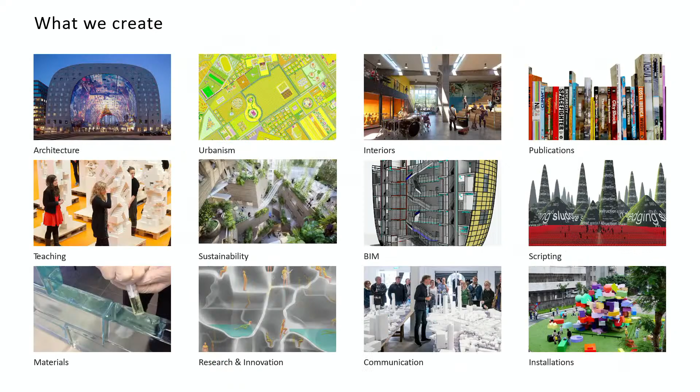And the office is known now—we celebrated 30 years of MVRDV—for a variety of things, but mainly I think for always this combination of research and working at all different scales, and this will also come back today in the lecture. It's probably most known, especially here in Germany, for the Expo Pavilion from 2000 in Hanover. It was kind of the groundbreaking project for the office. Other milestones since then were the Markthal in Rotterdam 2014, the Depot, which I will talk about today and which opened recently, and even newer, the Valley in Amsterdam.

So, stimulating heritage—as I said, I thought, okay, how can I connect this to what we do in the office? It's a theme, it's in Armenia, and actually we have a few projects there. I also had to think of this example from Yerevan, this brutalist monument, and then I thought, okay, this is actually the link to introducing a third project. So I hope we don't expand the time frame too much, because I think it's about how can we treat heritage in a different way, and I will frame it to talk about how can we treat the monument, how can we treat the shelter, and how can we treat the campus.

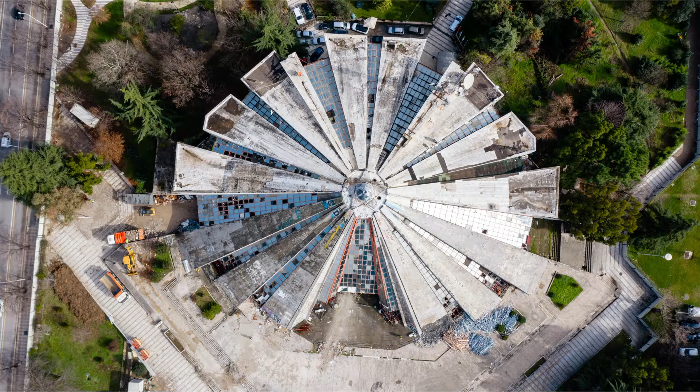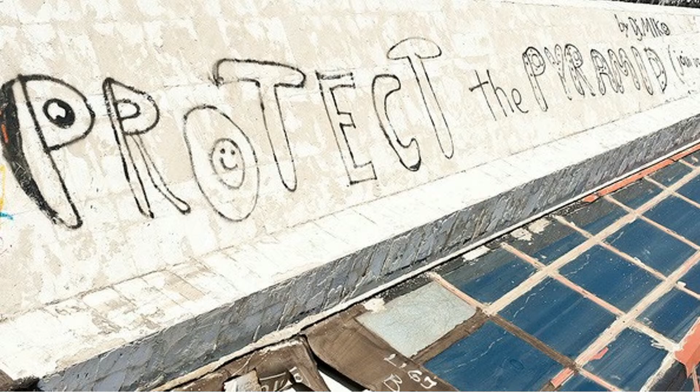And I start with the monument, specifically the Tirana Pyramid—that's also the link. This is an old monument built in '88. It was supposed to be a monument for the old former dictator Hoxha, and it was vacant for a long time and empty, and most of all it got neglected and taken over by the people. There was different use of it, cultural institutions or bars and clubs, and as it is so dominant in the city, people just took over. And when they heard it should be demolished, and actually the new parliament of Albania should come there, they protested, and they did it pretty wildly. So the government was a bit in limbo—okay, what can we do here? Because we cannot just make a new parliament.

So the question was, how can we save such a neglected monument? This is the link now to Yerevan, because an institution called TUMO, which many of you here know, came into play, and somehow we got connected via the government of Albania. TUMO is an organization that is a center for creative technologies, free education for young people. It seemed that this is exactly the right thing that Tirana and Albania needs at this uprising situation where they are investing a lot in architecture and infrastructure. So we got matched together to create a new hub for these young creatives, and the pyramid seemed to be the right spot for that. So the ambition was that we had a pyramid in the past.

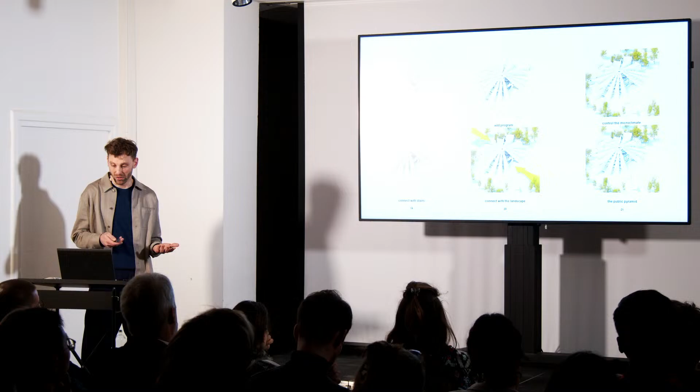And as it is kind of a hollow shell, we thought, okay, we can stack program into it in shape of boxes, as many as we want and need. And then it was about creating the access and openness to the building by adding a new facade.

So this is a quick program analysis. It mainly should show that, okay, there was a program intended by TUMO to be used, and there is something that should be used by other parties for the public. And we thought, okay, there is also part that overlaps, and maybe there are things from TUMO that the public could use and the public that TUMO could use. And if we spread it into the surrounding, we can actually make the access bigger. So this program got stacked in different boxes into the pyramid and the pyramid around.

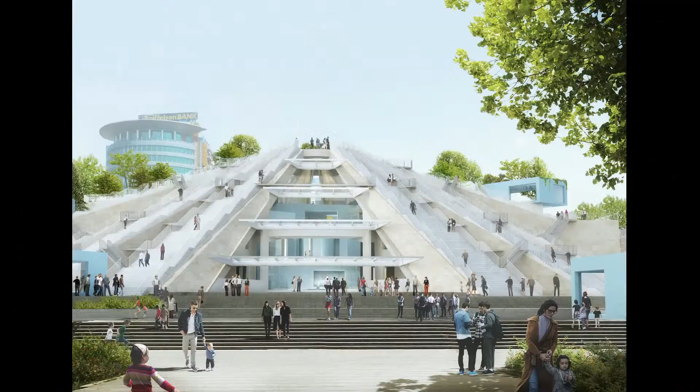So these are early concept images. And from the beginning, there was this differentiation of boxes that are for TUMO and for the public. So here, a first sketch of how this should connect to the surrounding. When the boxes are inside, they are also stacked into the existing structure. That means simply in the middle, you have boxes that are stacked on each other. It's their own structure, but sometimes it's more complicated because you're intersecting with an existing monument in that sense.

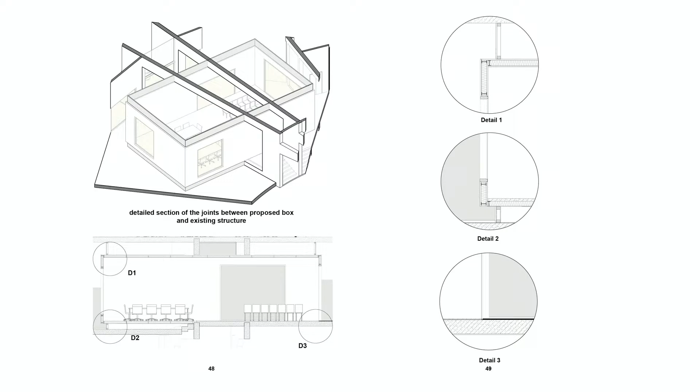But it worked out quite nicely, and at that stage we thought, okay, actually it's something I only heard in preparation for this meeting, that usually we are the ones who come with the color, and it seemed like when we came with this first proposal, we wanted this clean monument, one color, bluish from the foam. That's a bit of a fetish, I would say. But then Winy was sitting with the Prime Minister at a table, and the Prime Minister gave a little hint, because it's also not the first project we have in Tirana. The Prime Minister said, okay Winy, we bring MVRDV here to Tirana, and the first building has one color, and the second one, another tower in the center, has one color, and now you give me this again, it's one color. That was the moment when we said, yeah, rightfully, this is a project for the city, it spreads out, so it's nice to introduce a color scheme, and everyone got happy by this.

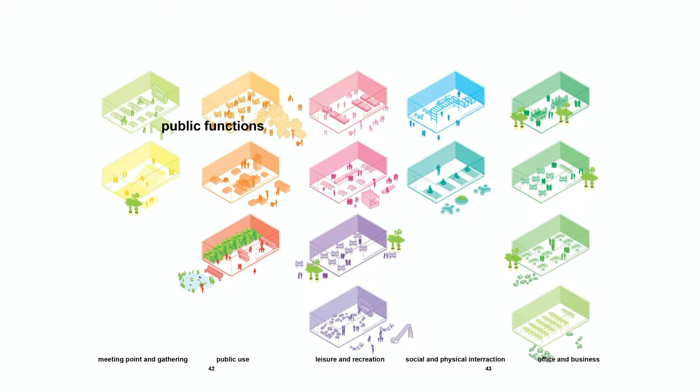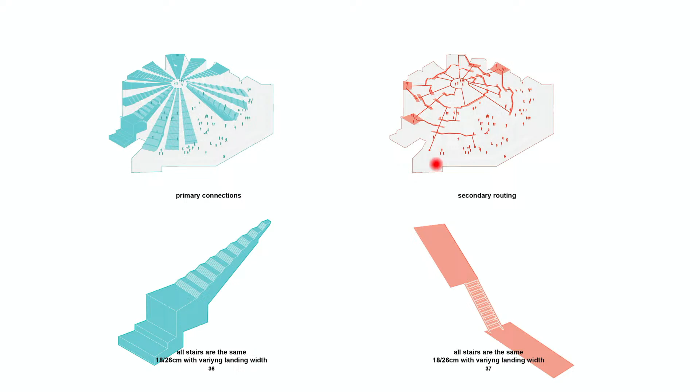So this is the internal connection stairs.

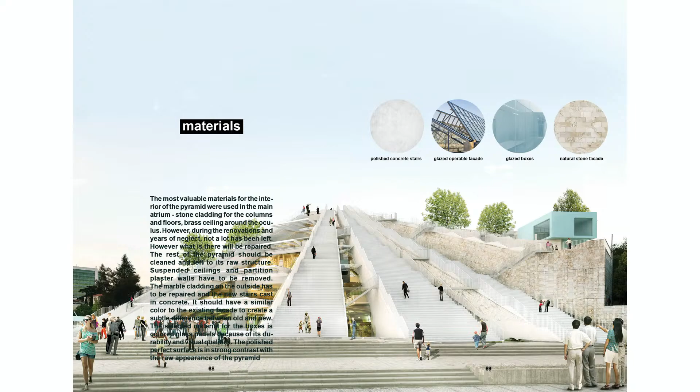What we always try to do when we work with heritage is really expose it as much as possible, so that you can read what is the old, what is the new, what are traces, so that when you go to the building, you also witness what happened here over time. So that's something we did when choosing the materials.

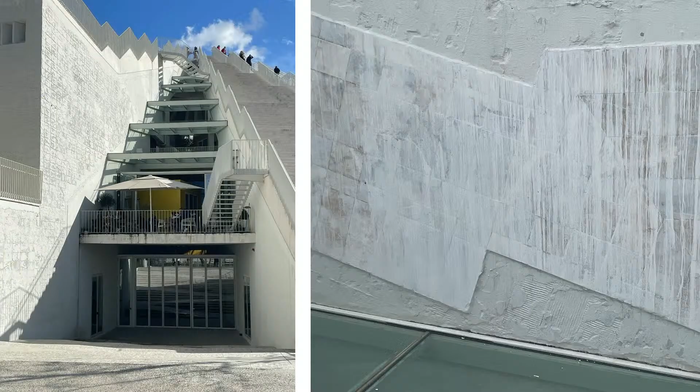Besides these colorful boxes, they are new. The former monument had this natural stone facade, but over time, as you saw, it broke down and fell apart. So for us, the idea was to keep the natural stone where it is, and where it isn't, we fix it simply by painting and plastering, which you see here. So then you get this very rough appearance of the old and the new, and where it was possible to keep it and where not.

This was the state when we started, and it was very adventurous site visits.

But this is where we are now, and it's really beautiful to see how the building got accepted by the public so much, because they already had it, they identified with it before, but now it really gives public space to the people.

It gives a different experience when walking up and down. It has a lot of viewing platforms, so when you're there, you really see people hanging out and enjoying the view and their city, and it's nice how you can see that the city is really in rapid transformation.

Yeah, and we always try to add a few funny aspects, so glass floors is one of those. They come back in many projects, and also here from the top you can look inside into this void and experience from the top and from below, which is quite beautiful.

So I think this image sums it up quite nicely. What we can do with a monument that maybe others would have already demolished, but if we really analyze it and bring it together with the right parties, like luckily we had here in this case, we can make something extraordinary. Ultimately this acceptance is also probably the most sustainable part of this project, because instead of demolishing, we really took the effort to see how we can give it back to the people.

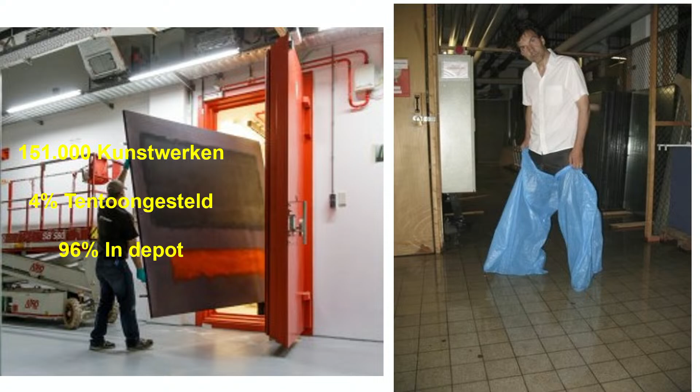Depot Rotterdam belongs to the great museum Boijmans van Beuningen, and it's in the center of Rotterdam. It has a classic museum with all the big art that there is. But it had one main issue in the last decade, and it was that most of the artwork was stored in the basement, but then the groundwater couldn't be kept away, and so it had to move.

It had to be saved in a warehouse. So that was the initial idea for this new project, because it's a bit of a shame if all this amazing art is in such a warehouse on the outskirts of Rotterdam.

So that was when, I think it was 2015, the competition was started, and MVRDV in the end was the winner. I'll show how we came up with this volume simply.

So there's this site, for those who were in Rotterdam already, it's called the Museum Park. It has a big square with the European flag designed by OMA a long time ago, and it's an axis between the Kunsthal, the Museum Boijmans van Beuningen, and the New Institute, which is also the architecture center of Rotterdam.

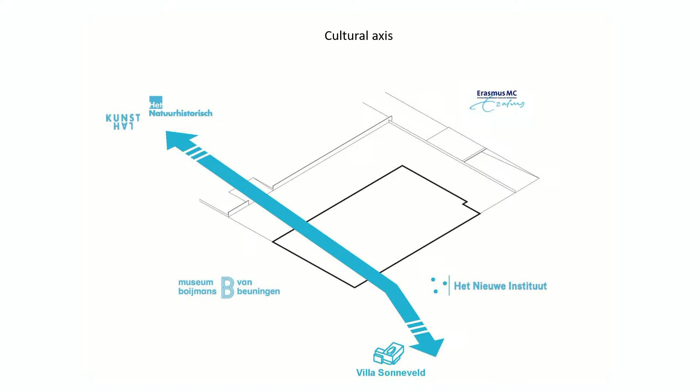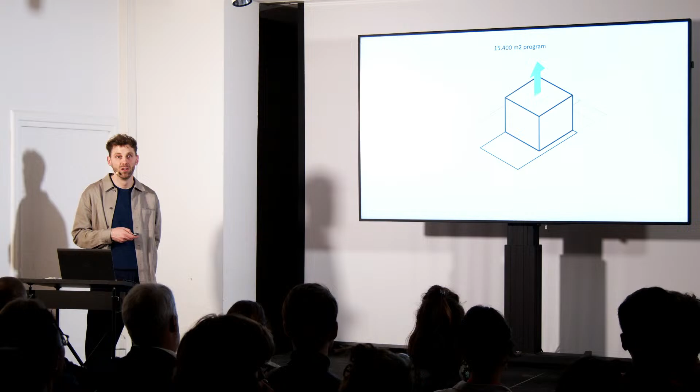That limited the site already, and back then it was a square with a lot of trees, which was important. So the site was limited, the program was still a lot, and the question was how to create a volume that fits into its surrounding, because all the surroundings, besides the hospital on the other side, are lower, and also how to gain the acceptance by the people again if you take away their green park.

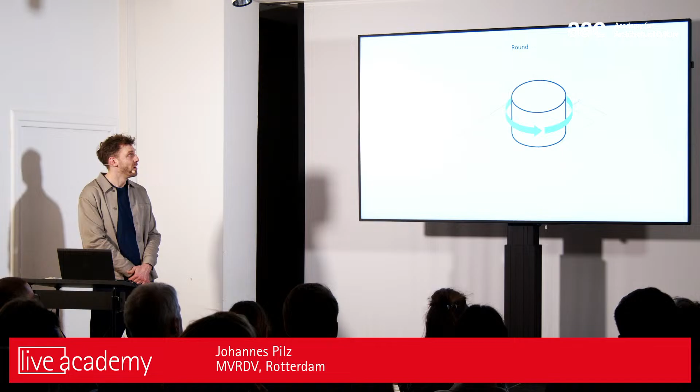So we thought, first of all, a round building, you don't want to give them a facade or block any direction, and you want to minimize the footprint and maximize the public space. So that's why we shaped this cup shape at the moment.

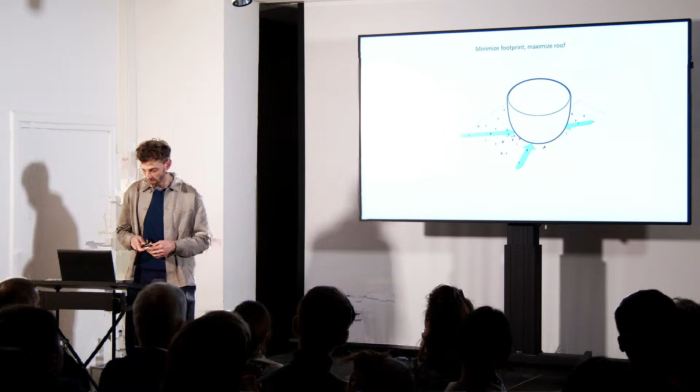And there was another reason, because every 2 years there's a big theater art exhibition there. It's called the Parade in Rotterdam. And they used this square, so it was really the task of how this new museum fits with this festival that comes there every 2 years. It's a big thing in Rotterdam.

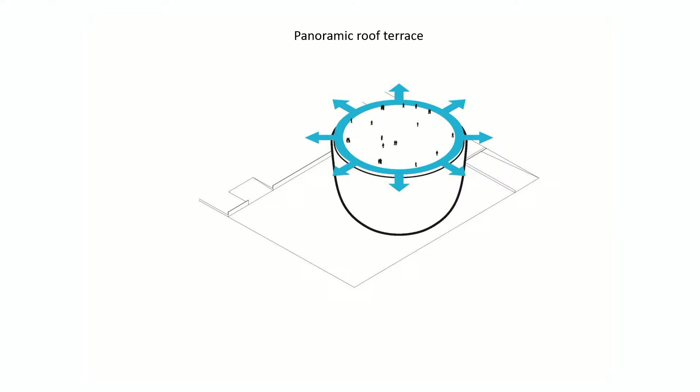It shouldn't be too tall. It should have a panoramic roof terrace to give back the public space, and it should still allow for the connections.

So ideally, you want to give a reflective shell, because that gives a reflection from the square. It lets you look around the corner if you have this round shape. The volume dissolves because it merges with the sky. And at night you see the interior, but also the skyline of Rotterdam. It's one of the main features.

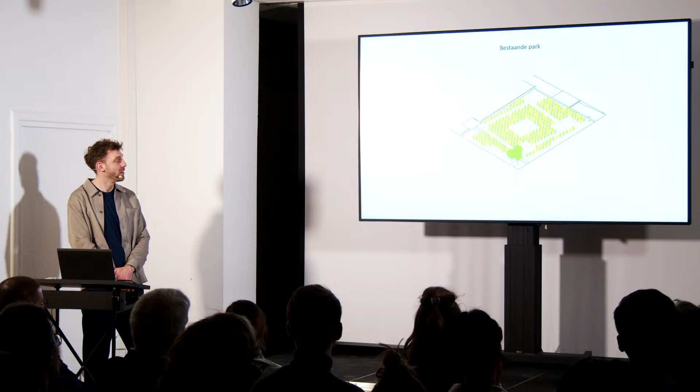Besides the mirror facade, creating a roof terrace gave us the opportunity to not take away the park, but to extend it and create a roof terrace that is publicly accessible. And that was a key argument also in the winning proposal.

Initially the idea was also to take exactly the same trees, and the effort was even made. They took all the trees, brought them to a tree nursery, and the idea was to bring those back. I don't know the whole story anymore, but it wasn't possible to bring all the trees back, so they had to replace it with the same kind.

So that was the concept. 2015. There was a long process.

There was even a lawsuit in between. It was resolved because they said MVRDV were too close to the director of the museum, and Winy always drinks coffee with him, so he must have known already. One of the main arguments was that it cannot be, because Winy doesn't drink coffee - if you are in the office, he wouldn't do this. So of course a joke, and not the main argument, but it was resolved that that wasn't the case, and we could start building.

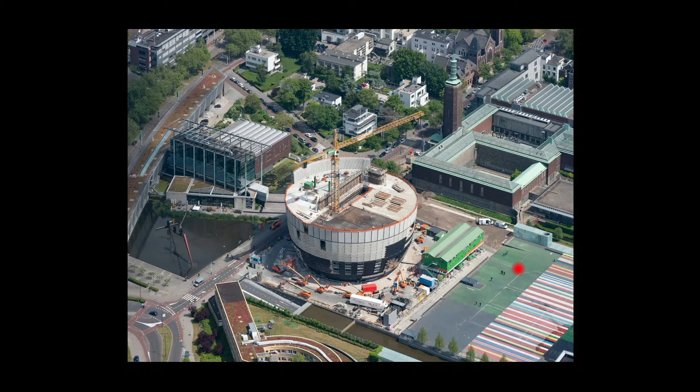So this is from the construction site. This is also the square by the OMA flag that I meant. Here's the museum Boijmans van Beuningen, and here that new institute, the architecture center. So here you see how the construction went on, already the facade starting while the top was just topping out.

And you see only these few openings because we're creating an art depot. So we want to make all the art accessible for people, and even though it's stored, you can experience it. That helps quite nicely with such a shape that is mirrored and doesn't need so much windows or access.

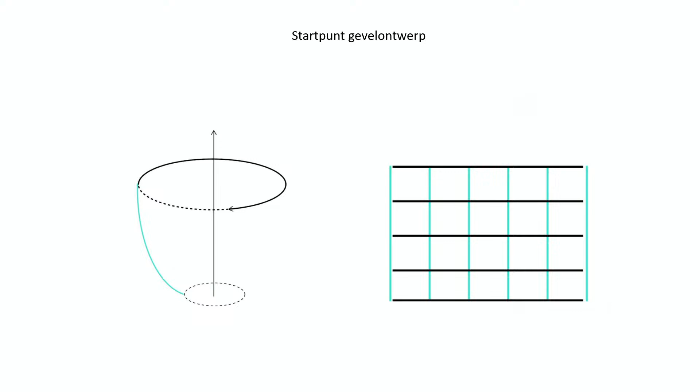But it also meant that it's a very simple building - the main point is the facade, and that you have to do right. So there was a lot of engineering and paneling, a parametric approach to it.

Obviously, the panels are double curved, and that's how the panels are in the end here to see in a mock-up, and also later on the building, how they are mounted and how it reflects.

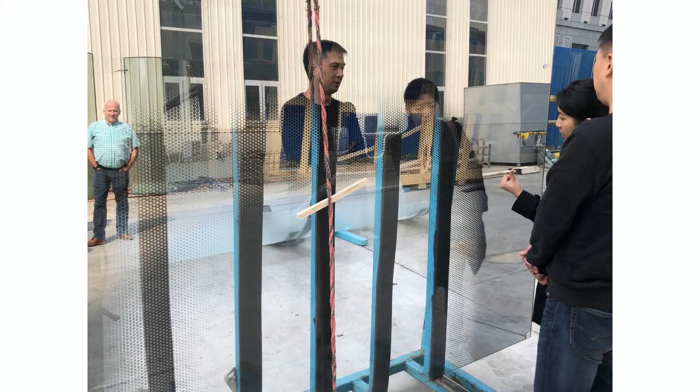So you saw the windows that also had to be solved. Obviously, how can you look from the inside to the outside, and how can it still be reflective? And you see this is by this silk screen print. It was even more important later when...

...the nearby hospital said, okay, we want to change this building because we have an institution where young kids cannot deal with this reflection. But we could easily change the print and say, okay, in some areas where the view is there, we don't have the reflection. So one thing was the mirror facade that had to be engineered and money had to be put in there, and the other thing was the access on the ground floor.

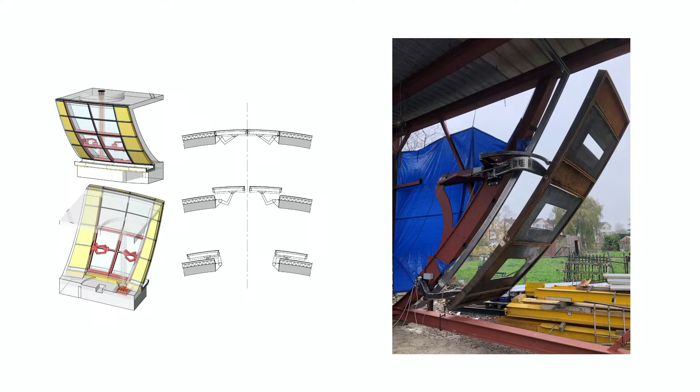This is maybe the downside of a building where you give it to the public and make the ground floor as small as possible—you have to cram everything in, the entrance, the delivery, and the side entrances. So the goal was to create this very engineered experience that can open and close, where the project gets this monolithic shape again, and the trucks drive in.

It looks like a very simple building from the outside, also when you're inside, but there were a lot of iterations, and it took a long time to actually come to this simple idea.

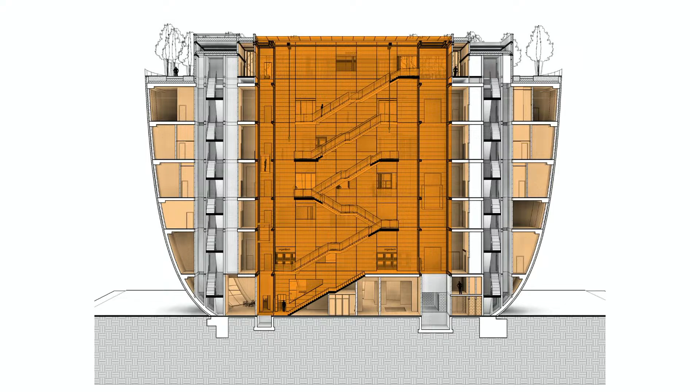You have this cup-like shape, with exhibition spaces on the side or some storage space, and a central void where people can walk, or whoever has access can walk freely and experience the art through windows. On top you have the public roof terrace, which can be accessed all the time during opening hours, but it's freely accessible. So the heart of the building is this void.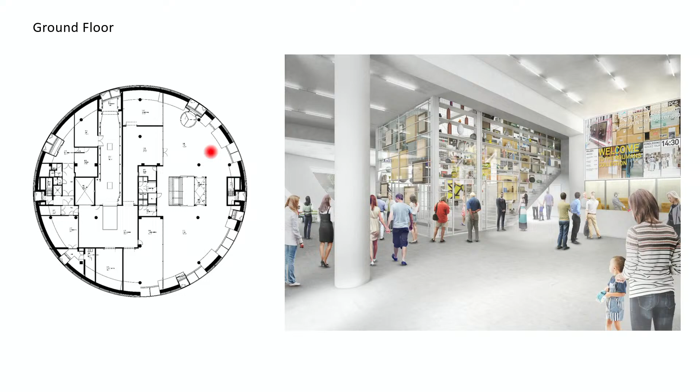It's a very cramped experience, but it helps a lot because when you enter, you feel like it's not so much space, but it really works, because then you enter the artworks and see how this void opens up. It's a very grand experience because you have this glass, metal—you see artworks hanging everywhere, exposed behind glass. So it really helps to have this threshold from the lobby into this atrium.

You can see the light on top, because this is the atrium connected to the roof. Going back, this was the intention from the competition: an atrium where all the art can hang, and stairs that cross up and down, so that you can have access by foot, but also by elevators.

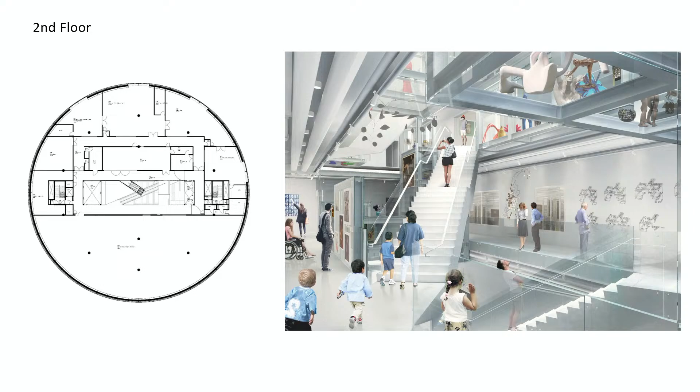If you weren't there, I really recommend looking up YouTube videos from these elevators, because it's quite an experience going up and seeing all these levels. Funnily, in the beginning, the project was designed thinking people will take the elevator up and walk down. Now the real situation is the opposite, because you enter this space, you have all the stairs, and you get pretty overwhelmed, and you want to experience it, so you keep walking.

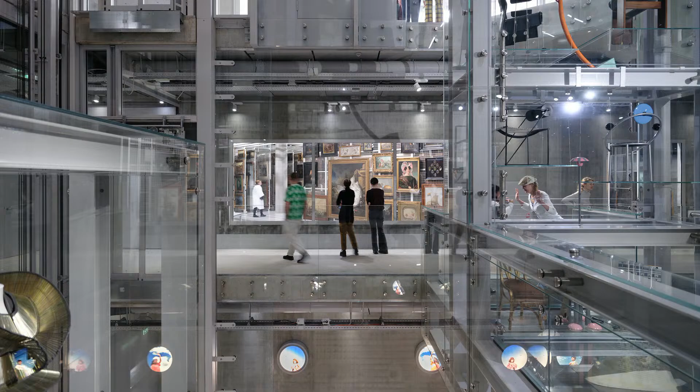This is a few shots of how that works. You walk a lot over glass floors, you have a view into the storage, and it works a lot with an app—you can check what is in this space. Very often they showcase depending on different topics, but in the end, you are free to just see what is there without too much curation.

You can take a tour and then really go inside and see all the artworks. There are also a few dedicated exhibition spaces for temporary exhibitions, and they show quite nicely the views to the city. There are these few windows that frame really different aspects of how the city is connected to the building—this is the hospital in the southwest.

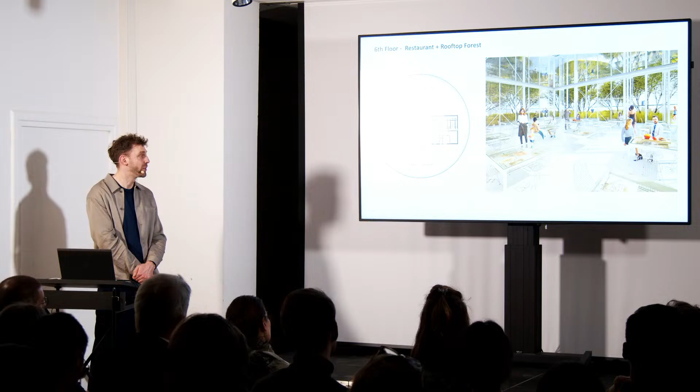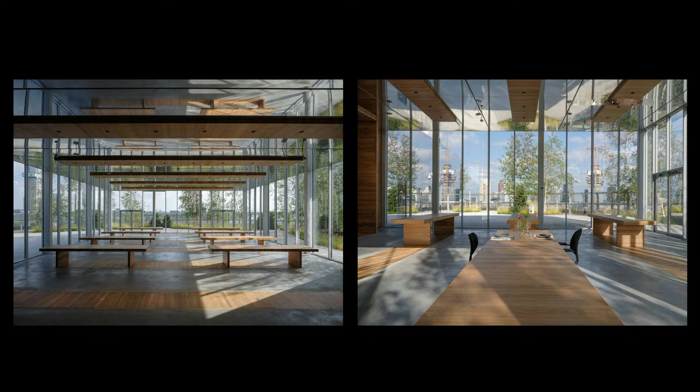The main feature for the public is the roof terrace, bar and event space, and the terrace with the trees. There had to be a lot of package to host these trees with this size. The objective was really to create this bar space as open as possible, so that you go up there, sit and drink your drink, but feel as if you are in the park as it used to be—with the addition that you see the Rotterdam skyline growing next to you.

It's quite an amazing space, and we're really happy that it's already become this new icon of Rotterdam. It's really used for all kinds of events—we always like to show this when important figures visit our buildings. It was similar with the Markthal, and it's the same now with the Depot. Who knows what's next?

Here's some views from this terrace. We have this pavilion that is mirrored, and you get the feeling that you're really in a forest.

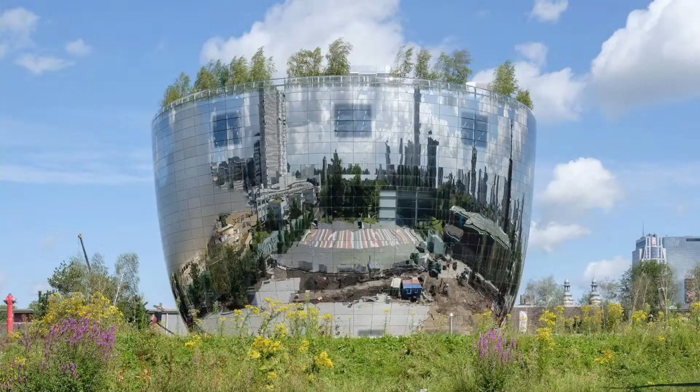Yeah, that's our mirror cup.

The third theme in terms of stimulating heritage that I want to talk about is Atelier Gardens in Berlin, which is probably the project that relates the most to the topic of the course. I believe also in size it's very similar. Atelier Garden is an industrial site for film production.

It's situated in Berlin, south of Tempelhof Park. You see the site here, with the highway and rail next to it, making it pretty disconnected. So what to do when asked to do such a project?

Unlike the first project, which is clearly a monument you have to deal with, and the second one which was a competition with a given program, now we have a bigger site. It's not just one object, and the brief wasn't really clear. So it was really about what can we find here and create here.

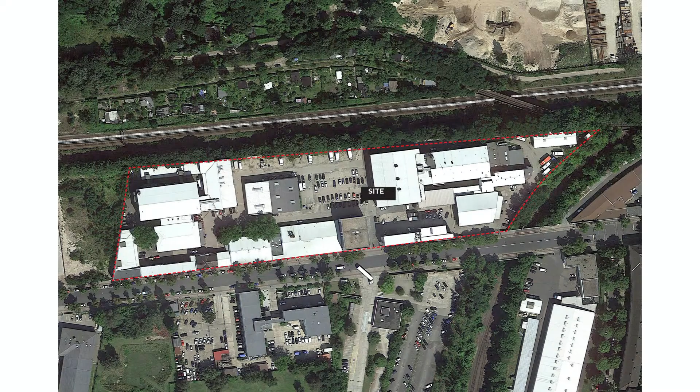This also showcases another aspect of the office where we are quite strong, which is the combination of scales. This project was started by our urban studio and finished by the German studio when it got into specific projects. We like this a lot in the office, because the urban aspect is very visionary, and then you bring it into realization.

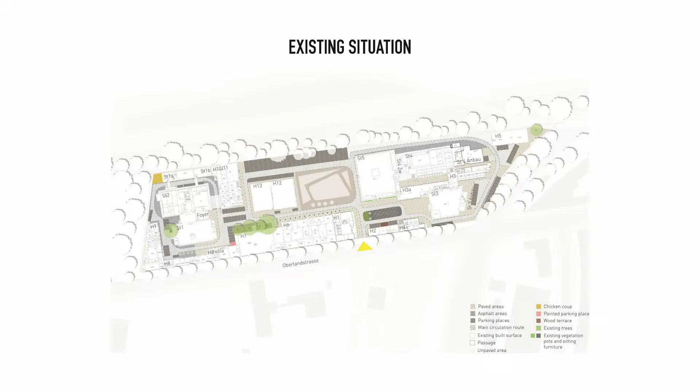So confronted with the urban part, a lot of analysis had to take place—really digging in, drawing a lot of maps, trying to understand the site and making sense of it. I'll go through a lot of slides which touch on this.

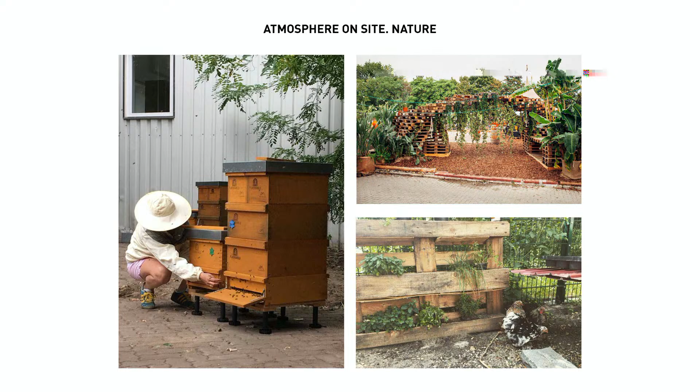For example, the vegetation. It's a site which, quite funny, is surrounded by trees, but on the site itself there are only 6 trees. Still, it got this urban gardening style over the years, I guess also influenced by the Tempelhof characteristic. It's a site that is pretty paved.

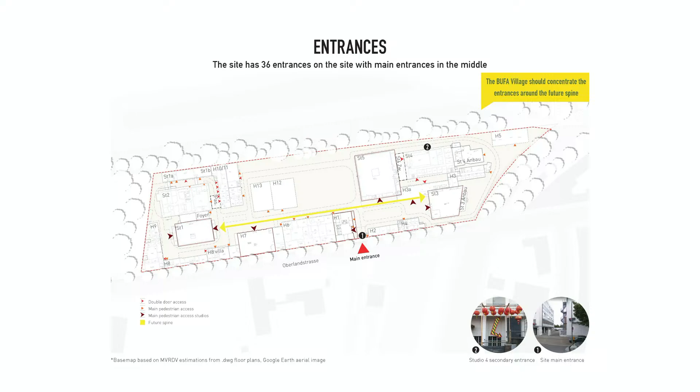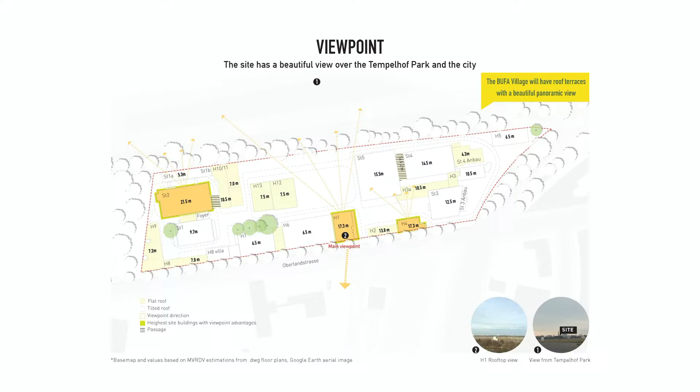It has a lot of entrances, but actually only one clear entrance. There's a lot of parking facilities, and our ambition was to create a car-free area. Some buildings were higher than others, which was very intriguing to us—you have this big park in front of you, and a few buildings can actually take advantage of that.

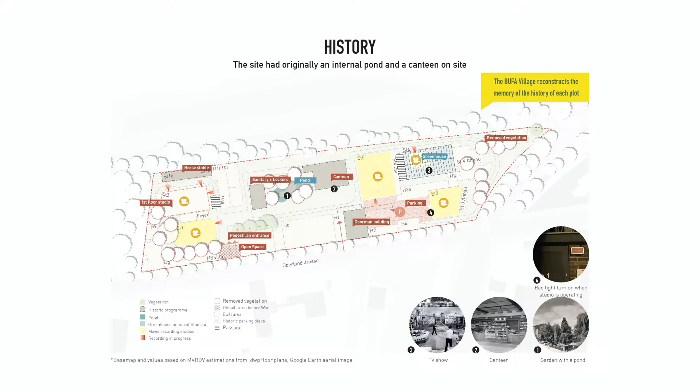There was a lot of history on this site, because it developed over the decades, always in a way of plug and play—other studios and facilities came in. You see here the main production studios, a lot of open space, and some regular buildings that were more office in character. This is how it used to be.

For example, when it all started—you see this glass house on top, which is basically to create a natural light condition for the space. It's very interesting that back then it was solved like this, with similar light conditions, and in general it didn't change so much what was happening here over the years, just that they had to bring in the light.

Also here you see the beginnings in the 1930s, a lot of beautiful production buildings out of brick, with a fairly okay density—1.0, so 24,000 square meters, not too much. You see already how it's oriented, with kind of a main square condition, especially considering that the site is really enclosed and very intimate, private, not connected too much to the surrounding.

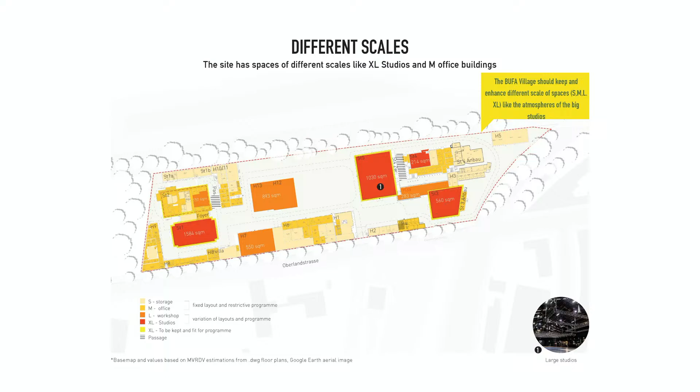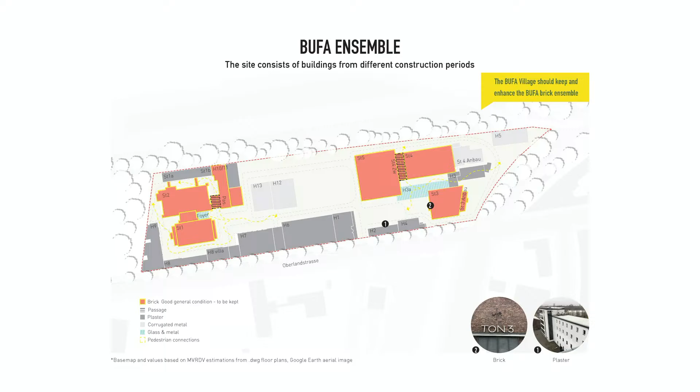And there are these different scales—you have the studios, but also the small offices and storage facilities. So what to do with this, also with this big contrast of buildings that have a very interesting architectural condition?

Here a few images mainly of the studios, called Ton 2, 3, 4, and so on. Usually they are open, flexible spaces. But then you also have this plug and play—later additions to the whole campus, of not so substantial architecture, or substance-wise not. That brings already a first evaluation.

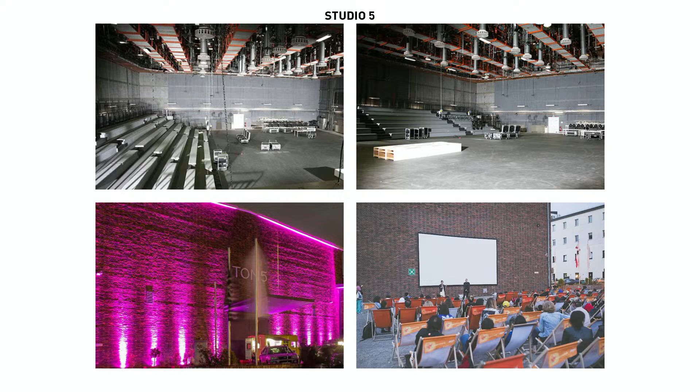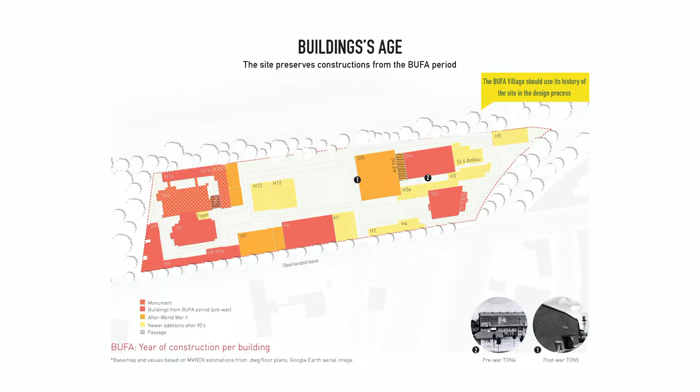Like I mentioned, the building age - you mainly have the pre-war buildings from the Bufa, and the buildings that came after World War II. This is, in short, the different styles you find on the site. The brick buildings are something where you feel you don't need to do a lot on the outside, while there are other buildings that could get more expression from the outside, and others that we valued as not too substantial, and they could be replaced.

The site already lives a lot by its spirit - it's a film industry, creative industry, and it's used a lot as event spaces, so there's already a lot happening, and that was the goal to carry on. This site is zoned as an industrial area, and it was clear it has to stay like this. It had to stay within the film industry, and could only be extended punctually with small offices or startups, which fits quite nicely with the character the site has at the moment.

So after this long analysis, we created our ambition, our objectives. We said, okay, this utopia feeling - it's a place where a lot can happen and you don't know yet exactly what it will be, so you want to facilitate this change. Obviously, I mentioned car-free.

So when approaching this from the urban standpoint, we work a lot with visions. We ask ourselves the question: what could happen here? And then we come to an image that is roughly the direction, but not so defined yet. Here are a few impressions that try to give the scenography for the whole site.

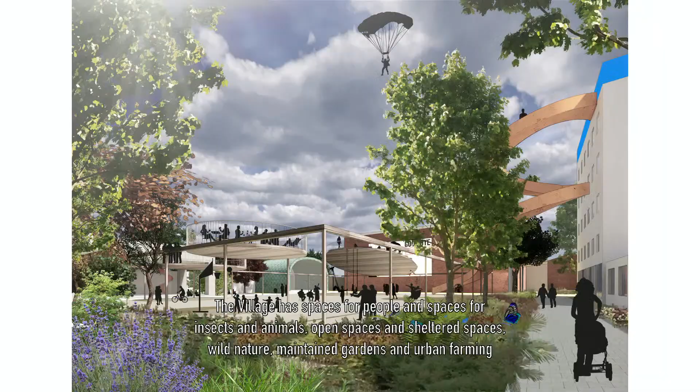So we said, okay, this is the main entrance. The village is car-free, and it promotes the use of public transport and bicycles. It's a place that stimulates biodiversity and welcomes all living creatures. The village has space for all people, places, and activities. And you see already we show a lot of green. We want to bring this together - the built masses, the events, and the buildings - where we already have our famous stairs that we like to add wherever possible.

But also this image was created because one of the main characters was really this main square, which we felt is very important to this site. These images should just give the character of - okay, it's a site for events, a lot can happen. You want to activate the free space, you want to make it green and sustainable. And we create a sort of image and treatment for the different buildings.

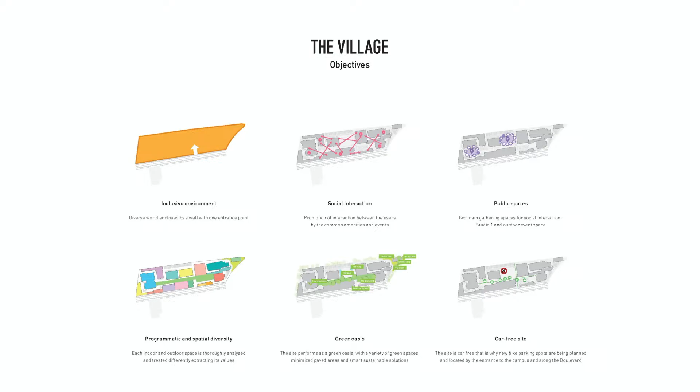And with that, so to say, our master plan phase was coming to an end, and we thought, okay, it really works like a village - because a village has this public space where people come together, surrounded by the different functions that a city and a community need to live. This was the driver for the theme, the Bufa village, and we created the main objectives in regard to that. We said it's an inclusive environment, it's social, there's interaction, it has public spaces, it's very diverse, mixed program, it's a green oasis, and it's a car-free site.

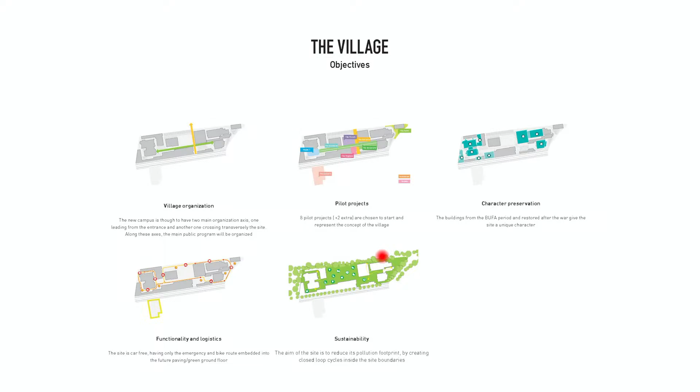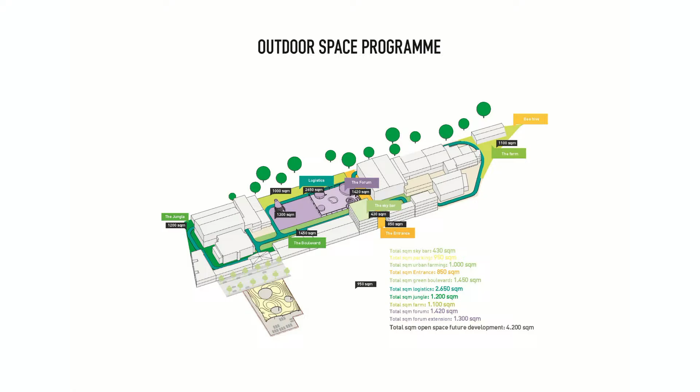And in that regard, most importantly, it has to be green, diverse, and sustainable. But this part here is probably the most important pilot project, because there was the idea to split the program - you will still have the working spaces from the film industry, but you will also have space to create new facilities, combined with a lot of outdoor space and program to bring this all together and to activate it. And that together gives us a master plan of a lot of ideas, a lot of projects.

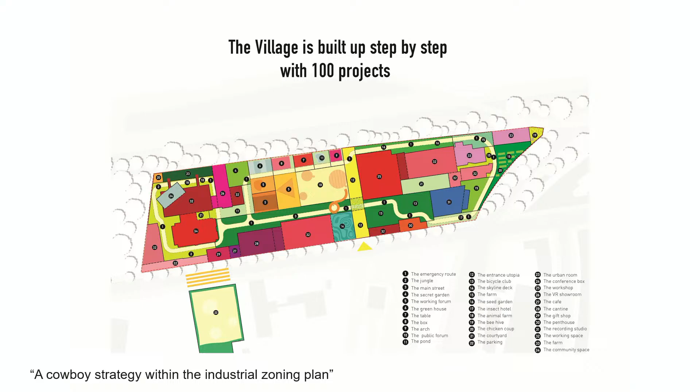But we have to start at one point, and that was really the drive from the client. This is a quote I picked up: it's kind of a cowboy strategy within this industrial zoning plan. The idea is, we are very limited here, and we have a lot of ideas, but we have to take it step by step.

So we have to start somewhere, and let's see where we are with starting like this in 5 years. Maybe something can be changed in zoning plans. In that sense, it was important to create more on a master plan level the character, the vision, and the spirit, and to start without limiting it too much to the future. Maybe then in a few years other programs become possible or even desired.

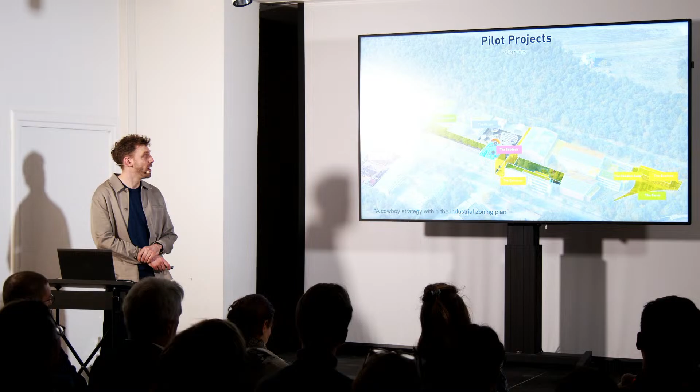So the village is built up step by step with 100 projects, and some are more important or more relevant to the site and the client than others.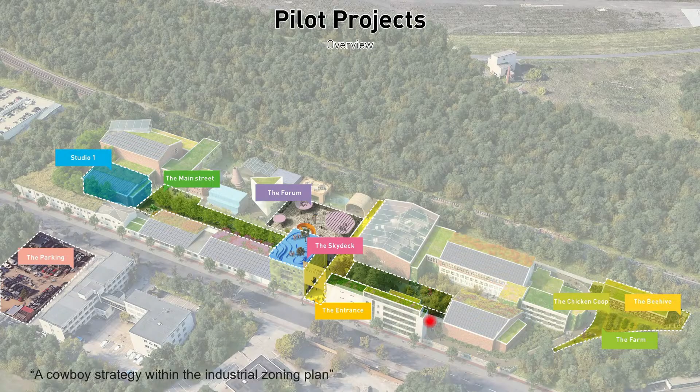I think this is now a nice overview to see the site. So this is the main entrance that I talked about, and the main ingredients are this forum, the main square, Studio One, the main street, public space, and Haus 1 with a sky deck. At that stage we had also this, but we focus mainly on these 2 pilot projects, which are Studio One, also called Ton One.

And the second project is Haus 1, where we said, okay, this is maybe a building that could need a lifting from the facade, and could need a top-up to take advantage of the height, because this is the building that really has the view over the Tempelhof Park. So you see here in the back, this is the stair that we envisioned back then.

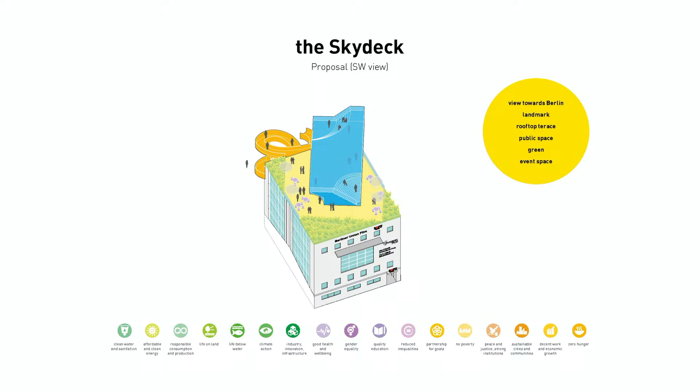I will tell a bit more in detail about these 2 projects, because that's the 2 projects that we took over then in the architectural studio. The landscape is done by a landscape architect with our coordination, and we started with building Ton 1.

So we thought, how can we keep this character of a neutral space to allow for adaptations of atmosphere, settings, different activities, and a space that is really as flexible as possible to welcome all kinds of people, scenarios, communities, that also stimulates this interaction that the client wanted to foster so much with the spirit. So we were really asked here to create a very flexible framework.

Back then we also worked really with different - actually, that's something we worked on with the whole master plan. I didn't include it in the slides, but with all the projects that we had, we always worked in budget categories: the low cost, the medium cost, and the high cost.

This is something we really like to work with, like a catalog of opportunities, because in that sense we can tease and show the qualities if we go a step further, but we also always have a fallback that is already a good base architecturally.

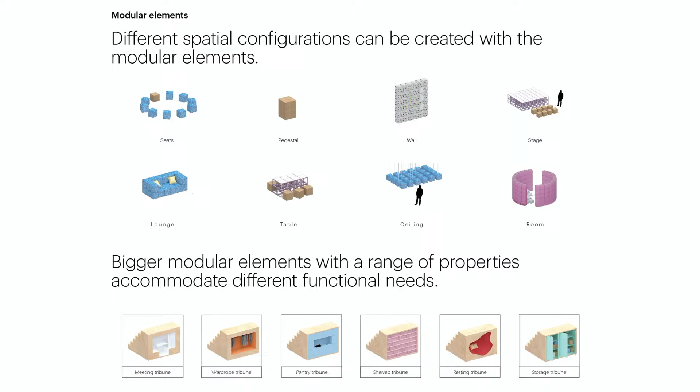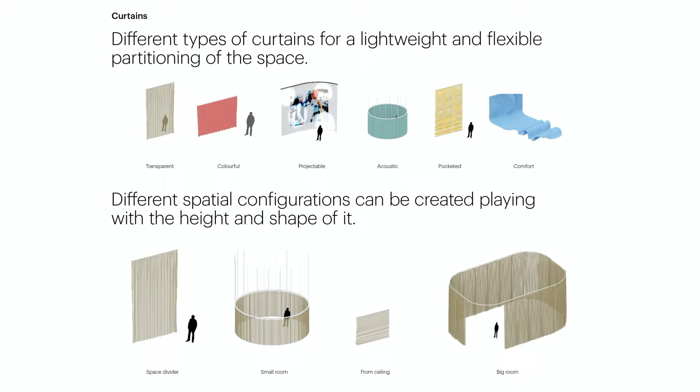And then the most important, the more iconic part of it is to use space dividers. So now at this stage we renovated the whole space and we want to divide it. We thought, okay, we want to work with curtains. So all we needed to do here was create a rail structure that would allow for as many interesting combinations as possible, with curtains that give obviously acoustic performance, so they help us in that sense, but they can also divide and give a specific feel to the space.

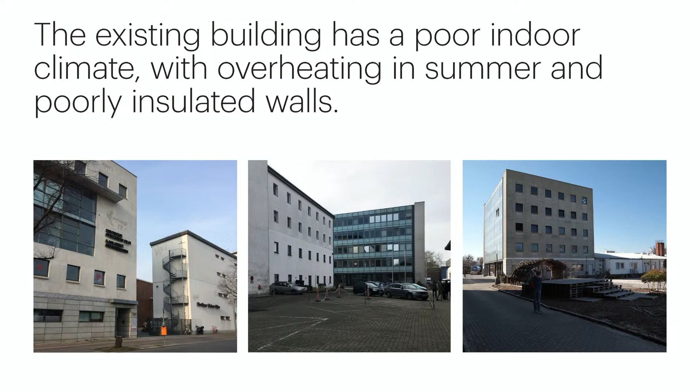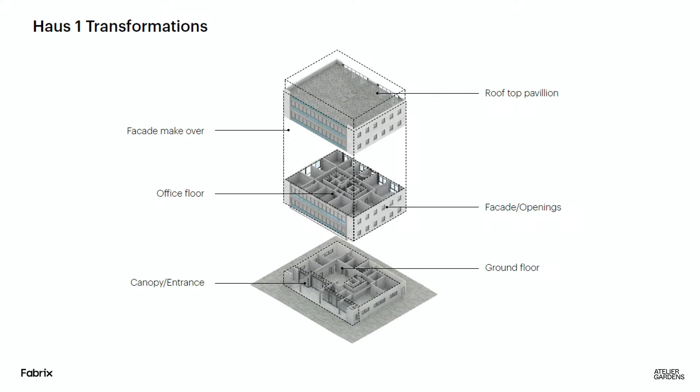And Haus 1, this is another important building there. It's the highest, it had a bit of a poor character, it was a bit run down, so it was clear to us that we need to work more on the outside. The approach was to make a facade makeover, to renovate the office floors, clean it up, renew it where possible in a sustainable manner, and to add a rooftop pavilion, lightweight, out of timber, and to free up the ground floor to host a community cafe, a hotspot for the community.

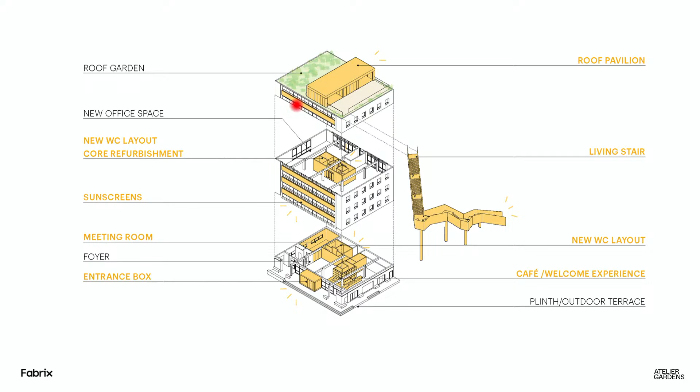So this is the first touch point, because it's also next to the main entrance, and to add this public element, the stair to the roof, so that everyone can, when they want, go up and experience the nice view over the site. And a roof garden, exactly, that is also there. So this was the conceptual image.

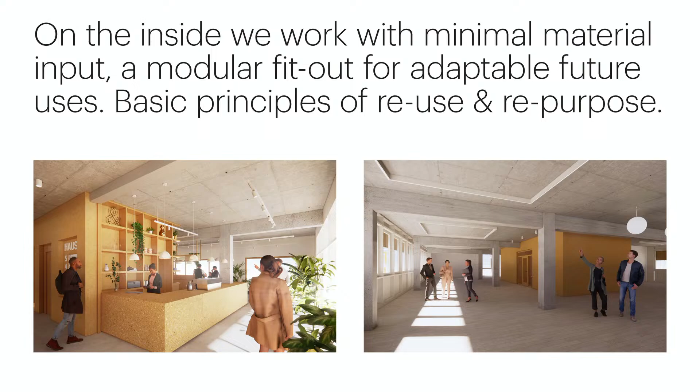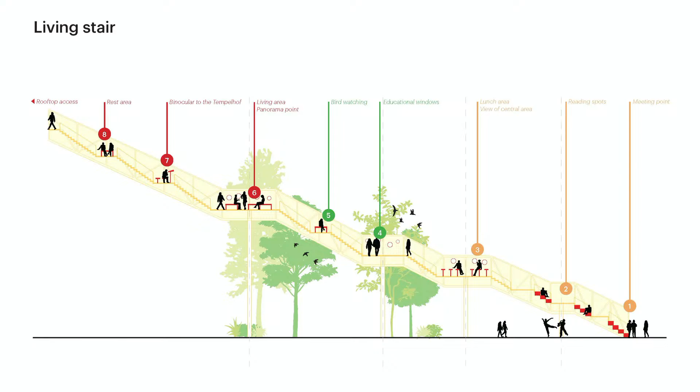We wanted to keep it very minimal. We chose one color palette. We cleaned up the inside, and we thought we make it more shine on the outside with these few gestures. The zigzag stair, which is a stair of different experience, so it's a bit wider. At points there are chairs and tables, so you are invited to also stop and experience the view.

And here during the construction site of our rooftop pavilion, and the view to Tempelhof Park you see here already. So this is really something where we felt that even with low investment, you get a lot out of it, because this terrace is just stunning and unique to the whole campus also.

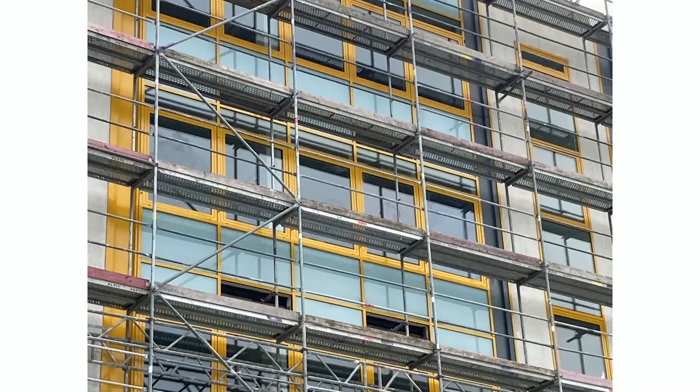Here, we wait for it to get really green later on, that will take a bit. It's not like with the depot where we put the trees on. Here we have smaller vegetation, and then windows that had to be replaced got replaced, but most of them just got a paint job. And here the ochre yellowish palette that we used for the facade and the stairs and the outside roof pavilion.

This is the space to this canteen on ground floor. Also, this was still during construction, so the connection is not there to the square yet. And this is the inside, so we use this color accent to give character and orientation. Otherwise, it is quite a rough condition, the building, which probably fits also to the character of the film industry.

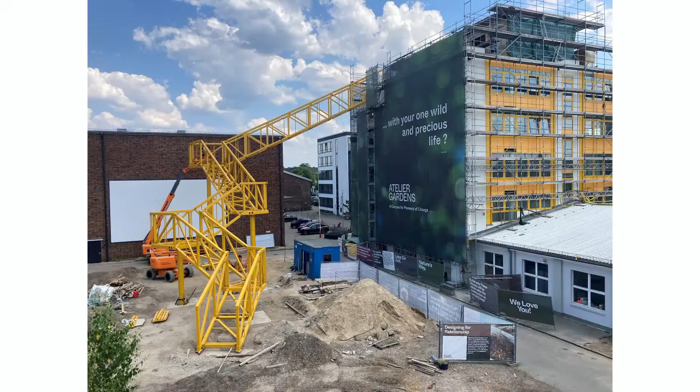And here the zigzag stair, when it just was under construction, the square is also used as a construction deposit, obviously. A good marketing is everywhere visible - here, 'we love you', yeah. Branding is very important for the transformation process.